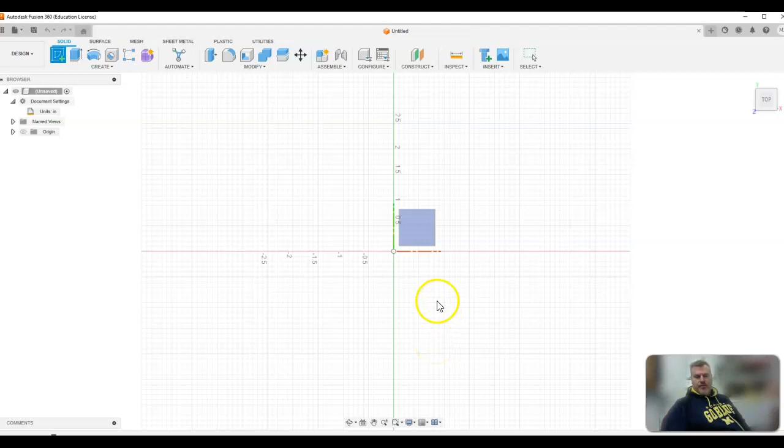I'm going to go ahead and create a sketch. Now, I wish it prompted you to do this, but I guess it does kind of on my cursor here. Select a plane or a planar face, that's the planar face that I want to go ahead and make. Basically what a thimble is going to be is a square with a hole cut out in the middle. So I'm going to go up here.

Now these changed, these are different things that I can do. There's even more options underneath the Create tab right here. Your basic line, your rectangle, which we're going to use, your circle that you're going to use, your spline, mirroring. This one's really important, dimension, that one's super useful. Cut or trim is useful. Down here, tangent, to make a line go to a curve and touch in only one point, very useful. Parallel and perpendicular, all of those are very, very useful. I have another video that talks about inserting DXFs on Fusion 360, that's very useful as well, if you want to put the Batman logo in something.

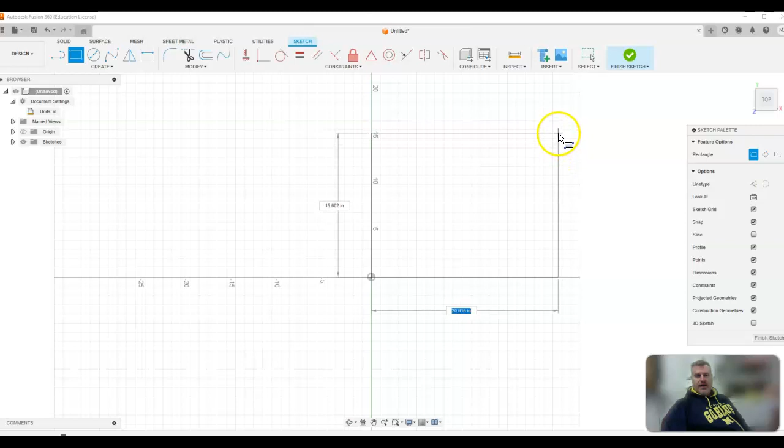All right, so we're down here. Bam, I'm going to go ahead and make my rectangle right there. Definitely not to the right dimension, so I'm going to grab my dimension tool, and I want it 17.5 inches by, down here, 17.5 inches. Now I got my little square that I want for my thimble all ready to go. Okay, so that is ready.

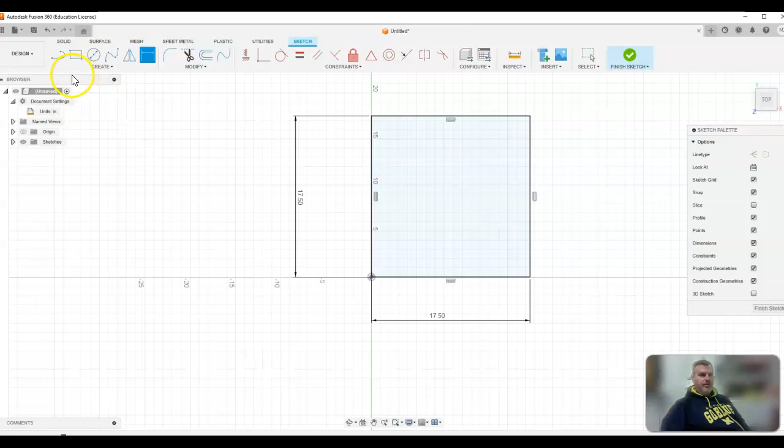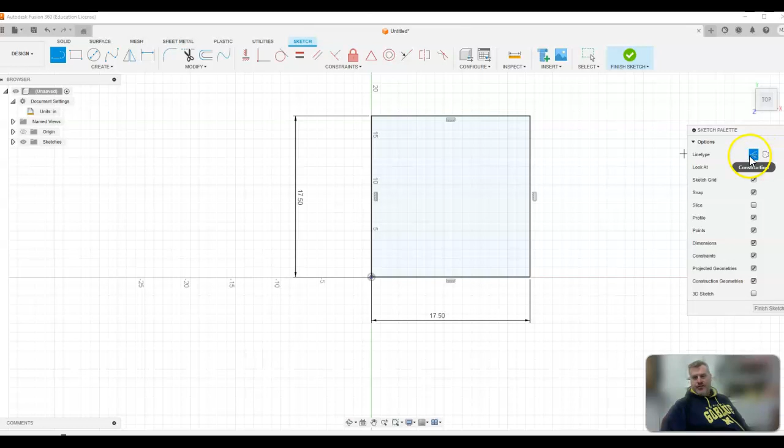Next thing I want to do, I actually want to put my circle. I could just make a circle and then dimension it to be in the middle, and that would be absolutely fine. Instead, I'm going to put two construction lines corner to corner, and where they intersect, that's where the center is going to be. I already clicked my line guy here, but I want to make it a construction line. You can do construction or a center line, it's really no big deal. But this will be, when we make it 3D and prepare it for the plasma cutter, these lines will not be cut, which is very, very useful. Okay, so I got that right there. I'm going to go ahead, put my circle in.

I'm going to go circle, go ahead... oops, I made a mistake right there. So we want to go back. Escape didn't do it, here's my back button. Cool, I left it on construction line.

I'm going to grab my circle, center diameter circle. That's exactly what I want. This time I better turn off my construction line to make a normal circle. Now I could click it and dimension it to be 4.5 inches, or I can just type in 4.5 and it's there, all ready to go.

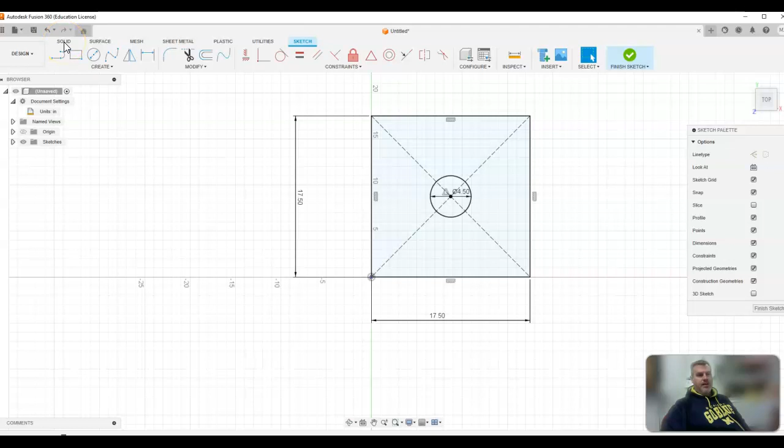Boom, right there. There's the lines, but I need to make it solid. So I'm going to go to my word up here. Remember, the words and the icons are not necessarily connected. I'm going to go to solid, and I'm going to extrude what I want.

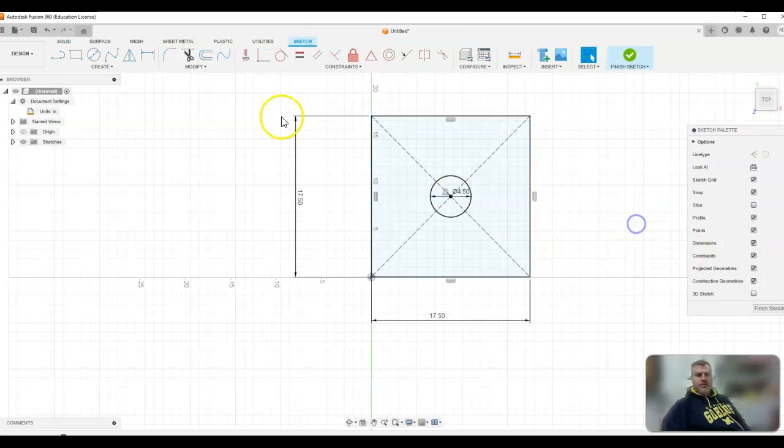So it says, first thing, select. I want to select what I want to extrude, which is that right there. And actually, you know what, I'm not going to do it that way. I'm going to put 4 little circles in the sides just to make it easier to mount.

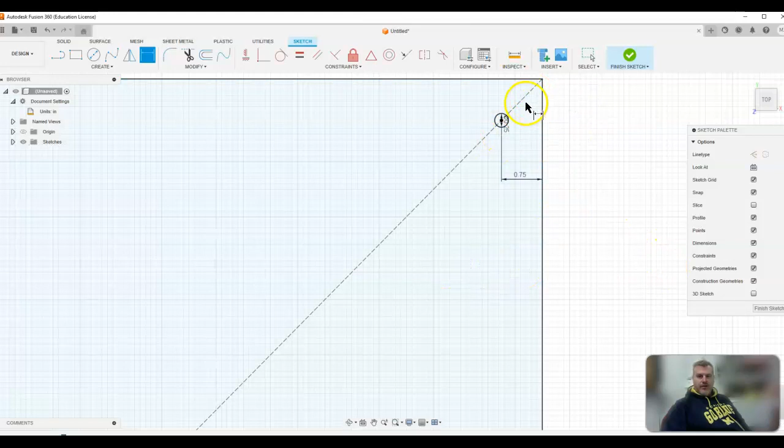So right on here, I'm going to make a circle, 0.25. I'm going to dimension this guy from the center to the outside. I want it to be 3/4 of an inch, so 0.75. Bam. And then down here, boom, boom, that should be 0.75 already. I'm going to cancel that because I was going on a 45-degree angle, so it's already 0.75 right there.

Now to move it over, I'm going to go ahead and do this. I'm going to use mirroring, which really I would probably just make another circle right here, but just for fun, I'm going to do mirroring.

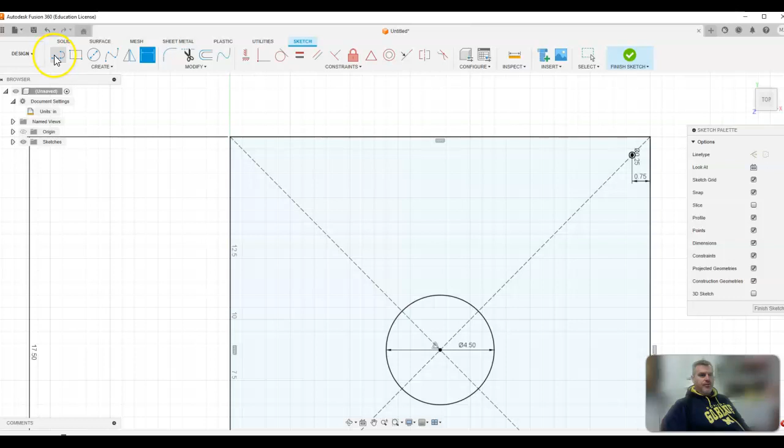I'm going to make another line, make it a construction type line, make it from the center right there. I'm going to make another line that we're going to use later on, still a construction line, from the center, 90 degrees, perfect.

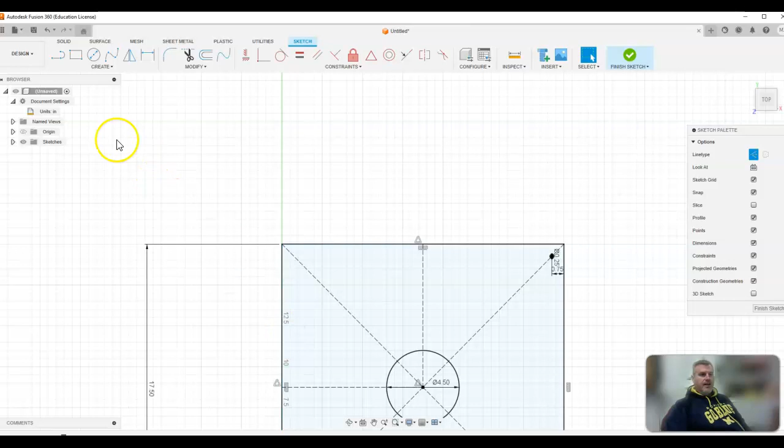Now what I want to do, I want to go ahead and mirror this guy. I don't know, because I've never done this before, I don't know if you have to have it selected first. I'm going to try it that way. Select it, so object 1 selected. If you didn't have it selected already, you'd probably have to select it now.

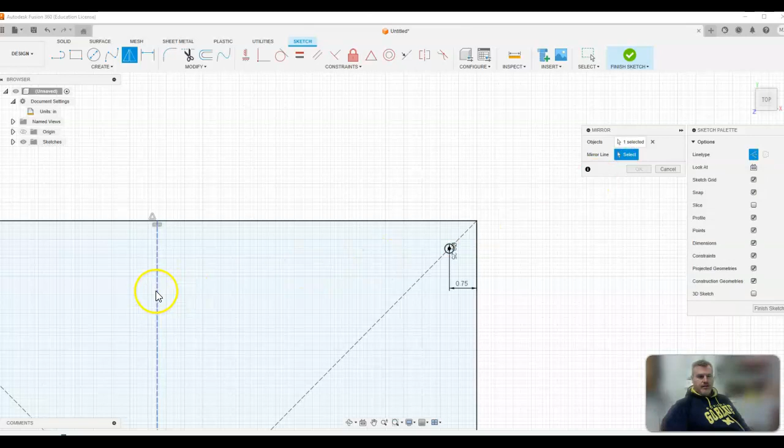Mirror line right here. And if I go to my pan tool so I can move it over and look at it, yep, there's that guy right there. Hit escape to get rid of the pan tool. Perfect, that's exactly where I want it.

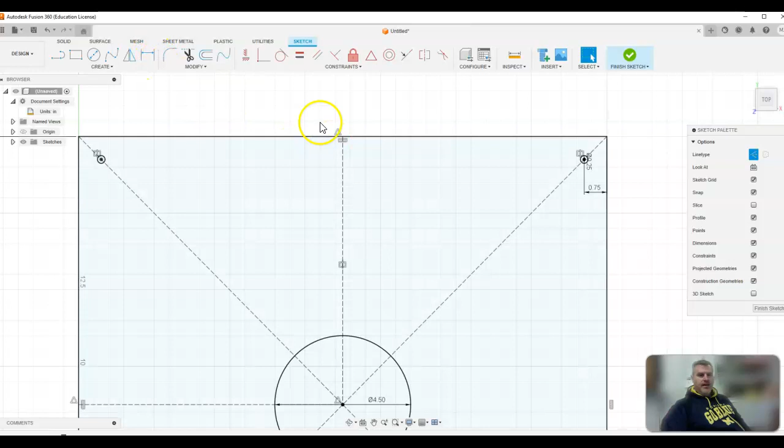Now, since we did this line here, I'm going to go ahead and mirror again. This time I want to do it without selecting it first just to see if it works. I'm going to hit mirror, objects, well I want you, and I want that guy, so I'm going to select both of them.

Mirror line, I'm going to click on that, and I'm going to say this guy right here. And if I go to my pan tool, pull it up... doesn't look quite right, I think something's wrong. I think I'm only doing the middles of those, I don't think I did it correctly.

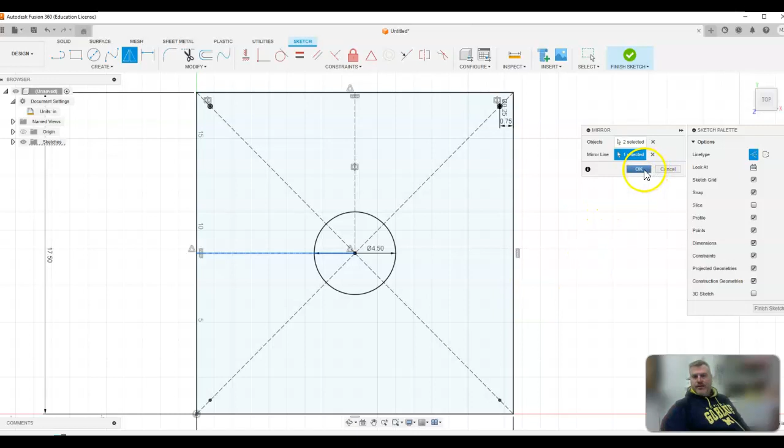I'm going to try it anyway, see if it works, and if it didn't, I will change it. Oh, yeah, that just looks like a point, that does not look like a hole. So I think I clicked the wrong thing.

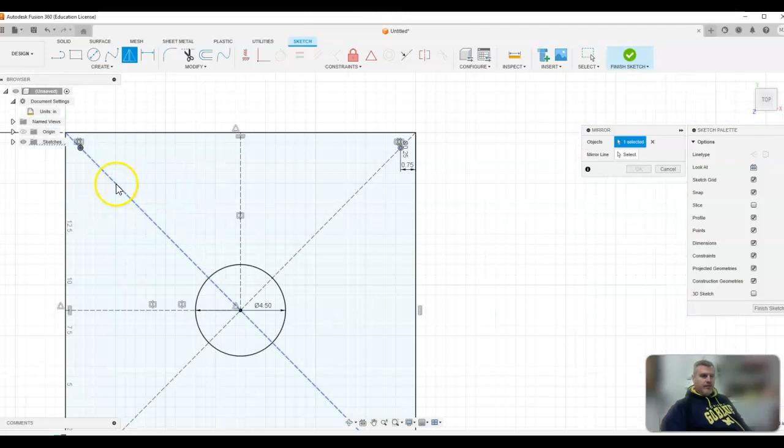So I'm just going to mirror the hole. Let's see here, go up to mirror again. Boom, objects. Don't want the inside... definitely looks like the outside. Select.

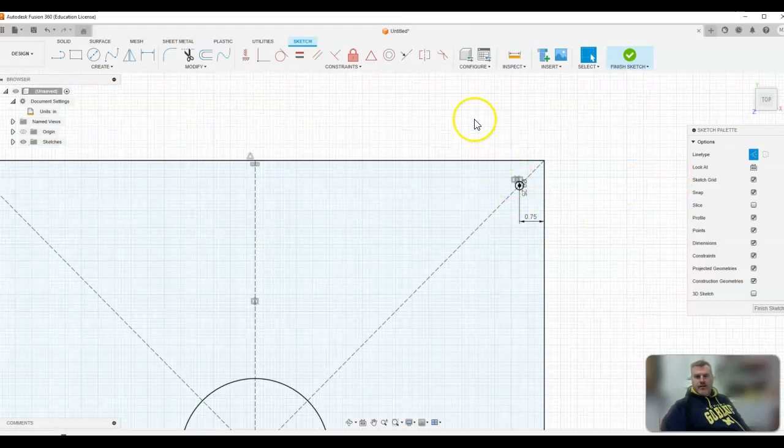Now at least right there, I have the little thing. Sorry, it's taking a little bit of time. Make sure I get the outside there. Hit escape.

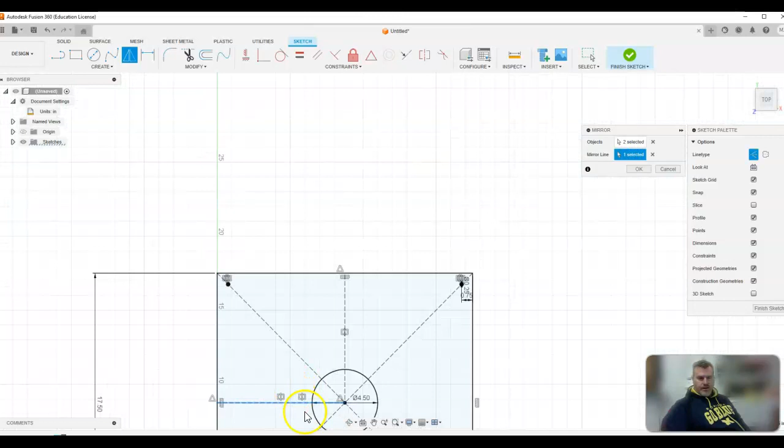Outside there, and mirror it over this line right there. Got what I need there and what I need there, so that looks good. Get rid of my pen. Boom, right there, now we have our nice little 4 holes right there. That'll make it a whole lot easier.

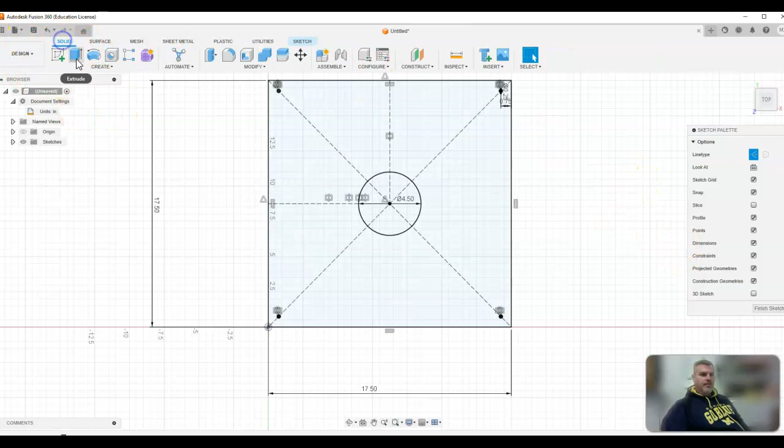All right, now solid, extrude. Grab what I want to extrude. That looks like these holes are absolutely perfect right there. All right, so profile, one selected, that's this guy right here.

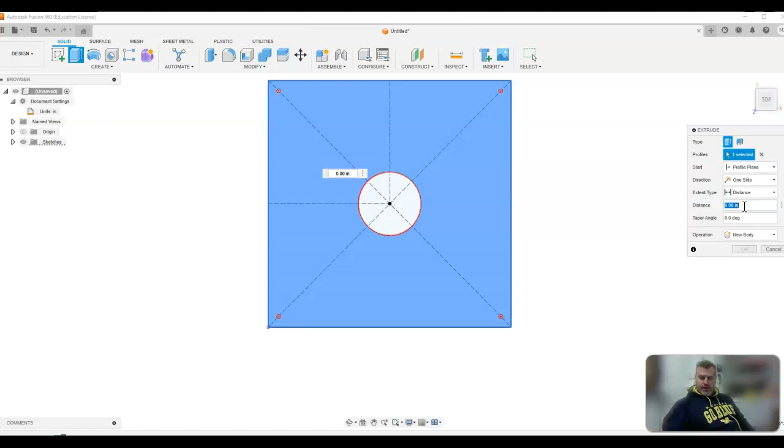Let's see here, distance, how far do I want to extrude it? It's not that important how thick the steel is, I'm just going to put in 0.25, it's about a 1/4 inch thick steel. It's a little under, but I'm just going to put in 1/4 inch and hit OK. That looks exactly like what I want to cut out.

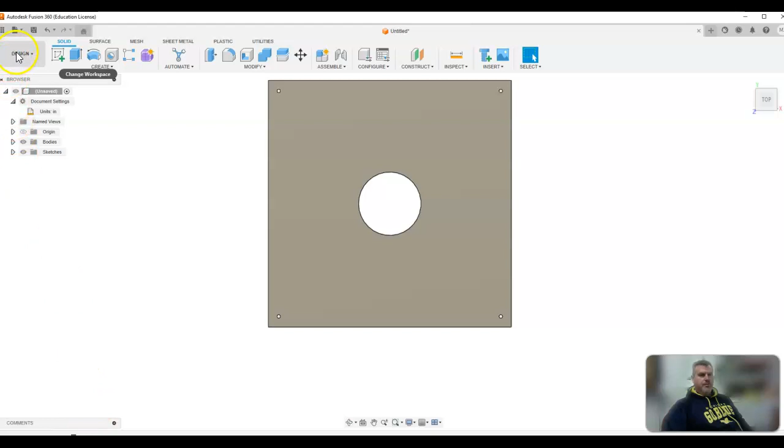All right, so we're going to go ahead. Now this is where the beauty of it is. Oh, I'm at 11 minutes right now. So we've made the part that I want to cut. The next step, which is going to have to be in another video because I can only record for 15 minutes, is going to be going to the manufacturing and telling the plasma cutter how to actually cut the thing out. So I'm going to end this video right here and we'll continue in the next one.